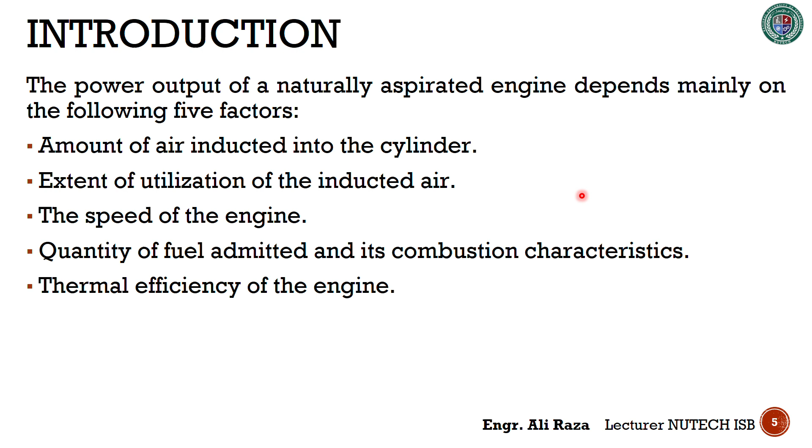It can be seen that the last two factors are interdependent, and major modifications might be required to achieve complete combustion, so this may not be a preferred method. The fourth and fifth factors are interdependent because if the quality of fuel is good—for example, if we are using high octane fuel—then the thermal efficiency of the engine will be high. If we are using low octane fuel, or the quality of fuel is not good, it will affect the efficiency of the engine. So these two factors, fourth and fifth, are interdependent.

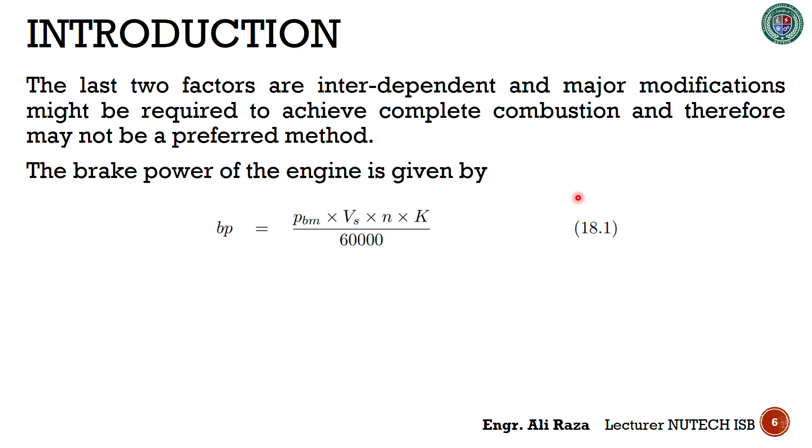The brake power of the engine is given by equation 18.1. Let me clarify that we are now learning chapter 18 from the book IC Engines by V. Ganesan. In these equations, we can see there are different parameters like brake power, brake mean effective pressure, swept volume, number of strokes, and number of cylinders in equation 18.1, which is the equation of brake power.

There are two factors in this expression, apart from the number of cylinders and cubic capacity of the engine, which can increase the power output. The first one is number of power strokes, and the second one is brake mean effective pressure, which is basically generated in the combustion chamber. So for a given capacity, we can increase the power output either by increasing the brake mean effective pressure or by increasing the number of power strokes.

It must be clear to all that there is a limit to the increment of both these parameters. We know that in a four cylinder, four stroke engine, there is only one power stroke among all four strokes, and the other three strokes are suction, compression, and exhaust. So it is interesting to see that there is only one power stroke in the four strokes of a four stroke engine.

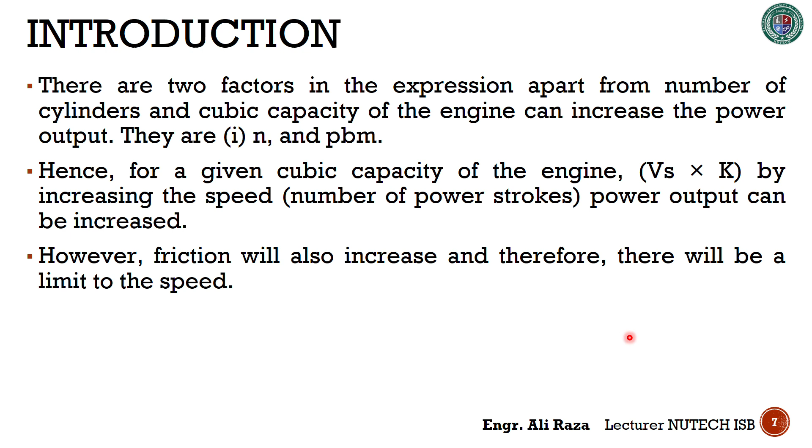However, by increasing the mean effective pressure, we will see there is a limit, because increasing it too much will create a lot of vibration and affect the pressure and temperature of the engine, so we have to see how much we can increase the mean effective pressure. In one line, we can say that if we increase the mean effective pressure of the engine, we can increase the power output of the engine. So the most preferred method of increasing power output is by increasing the mean effective pressure, which we can achieve by supplying more air or air-fuel mixture at a pressure higher than atmospheric pressure.

This will increase the density, thereby the mass of air or air fuel mixture inducted for the same swept volume. It is interesting to note that we are not changing the swept volume of the engine, but we are inducting more amount of air fuel mixture. So what will be the result? We will get high brake mean effective pressure, and then we can get high power output of the engine.

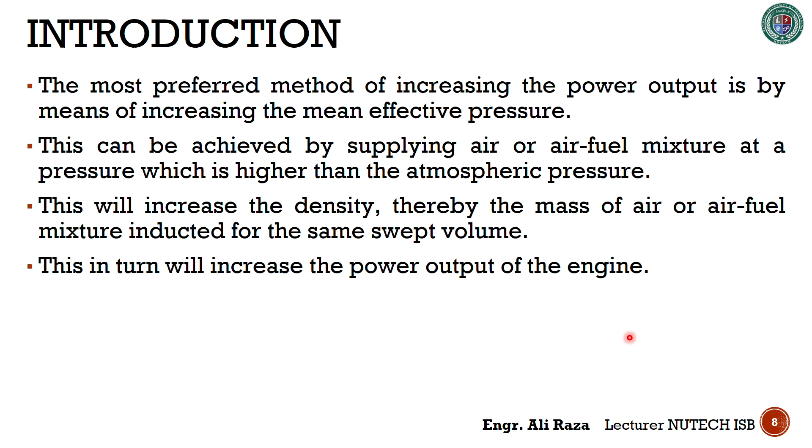At this moment, let us define the term supercharging. The method in which we can supply more amount of air or air fuel mixture at a pressure higher than atmospheric pressure is known as supercharging, and we use a device for this method called a supercharger. The bookish definition: supercharging is the method of supplying air or fuel air mixture at pressure higher than that at which the engine naturally aspirates by means of a boosting device, and the device which boosts the pressure is called the supercharger.

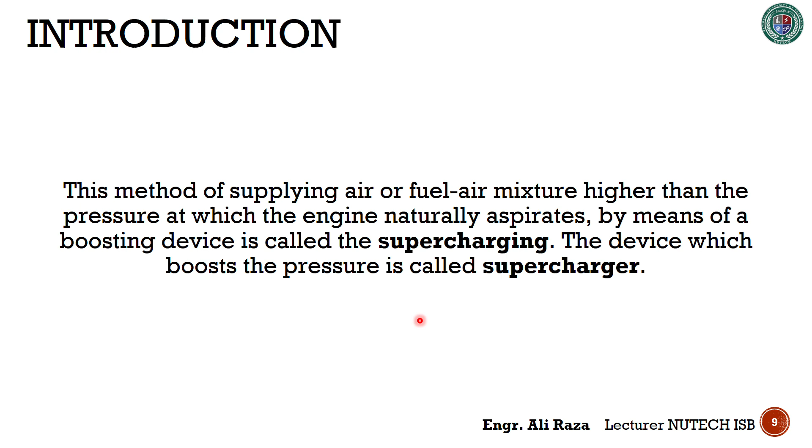So at this moment we have learned why we are using the supercharger, what process is known as supercharging, and which device is known as supercharger. Let's move further. The main purpose of supercharging is to raise the density of the air charge before it enters the cylinder.

There may be 15%, 20%, or maybe 30% increment in the amount of air that is being inducted in the engine cylinder. Thus, the increased mass of air will be inducted, which will then be compressed in each cylinder. It is interesting that at the same swept volume, more air is being inducted in the engine. This makes more oxygen available for combustion than the conventional method of drawing fresh air charge into the cylinder.

Consequently, more air and fuel per cycle will be forced into the cylinder, and this can be effectively burned during the combustion process to raise the engine power output to a higher value than would otherwise be possible. It is like when there is a more amount of air and air fuel mixture, it will obviously give a higher amount of combustion.

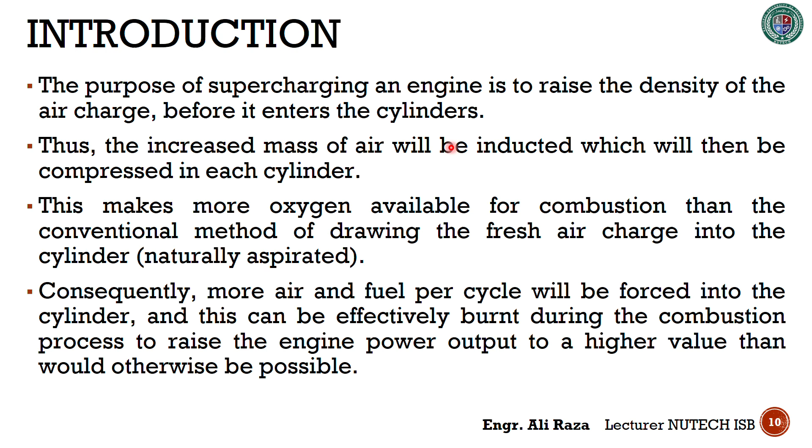There are some more important points in the process known as supercharging. Supercharging increases the power output of the engine. It does not increase the fuel consumption per brake kilowatt hour. This is the most important point. Sometimes we mislead the term supercharging by saying that it can increase fuel consumption, but it is not true. Supercharging does not increase the fuel consumption.

Certain percentage of power is consumed in compressing the air. This power has to be taken from the engine itself, leading to some power loss. But in practice, the power produced by supercharging is more than this power loss. However, it is seen that net power output will be more than the power output of an engine of the same capacity without supercharging.

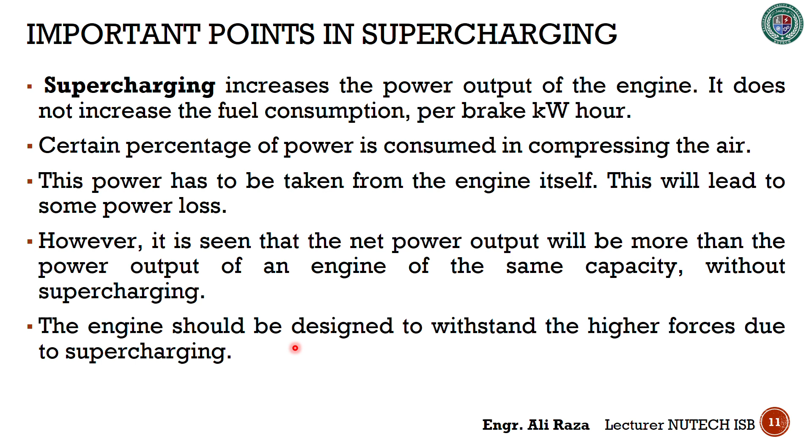The engine should be designed to withstand the higher forces due to supercharging, because the increase in pressure will create more vibrations and other thermal stresses on the parts of the engine. The increased pressure and temperature as a result of supercharging may lead to detonation. Therefore, the fuel used must have better anti-knock quality, meaning it must have a high octane number or high cetane number. In practice, racing car engines use supercharging.

The most important areas where supercharging is of vital importance are: first, marine and automotive engines, where weight and space are important. In marine engines there is a lot of problem of space and power, because there is much more space available in ships compared to ordinary trucks and buses, so we need a lot of power to run that marine ship in the ocean. Second, engines working at high altitudes - the power loss due to altitude can be compensated by supercharging.

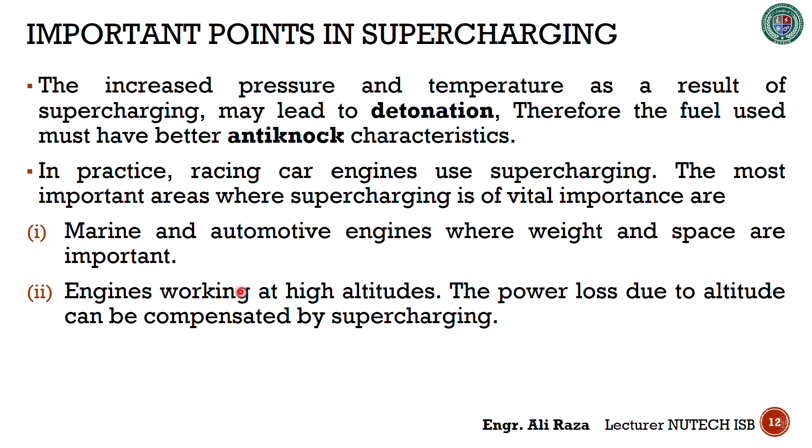Supercharger is a pressure boosting device which supplies air or mixture at a higher pressure. A centrifugal or axial flow or displacement type compressor is normally used for supercharging. If the supercharger is driven by the engine crankshaft, then it is called a mechanically driven supercharger, linked with the crankshaft of the engine. Some superchargers are driven by a gas turbine which gets its power from the engine exhaust gases - such a supercharger is called a turbocharger. So we can see that there is not much difference between a supercharger and a turbocharger.

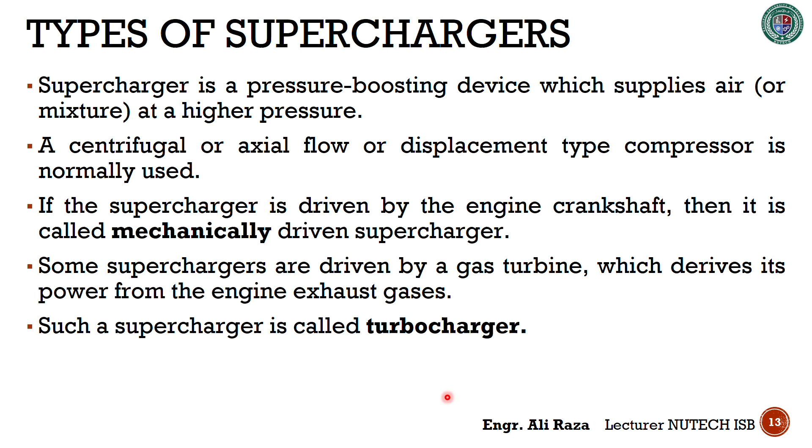So at the moment, let's see the types of superchargers. There are three types of supercharger: centrifugal type, roots type, and vane type supercharger.

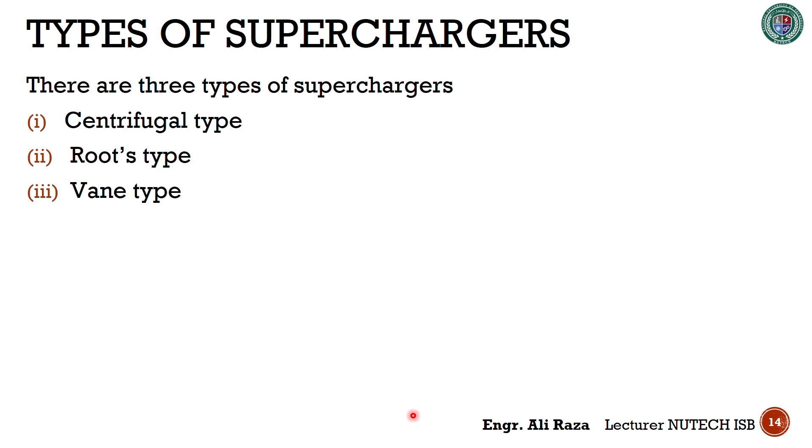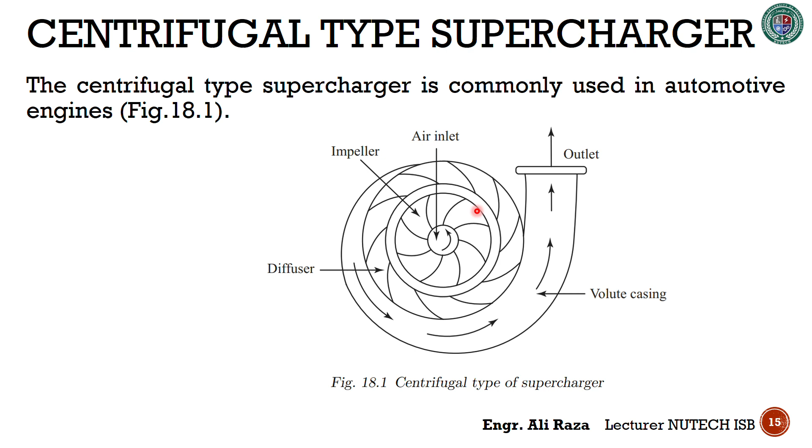So this is the complete functioning of a centrifugal type supercharger, which is commonly used in automotive engines. These are all the processes, qualities, or characteristics of centrifugal type superchargers discussed earlier.

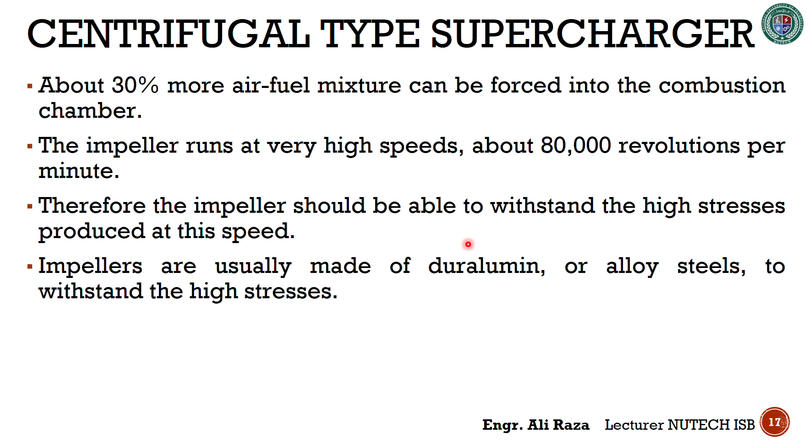The gears are of equal size, and therefore both rotors rotate at the same speed. Due to the equal size of gears, both rotors have the same speed. The Roots supercharger operates like a gear pump.

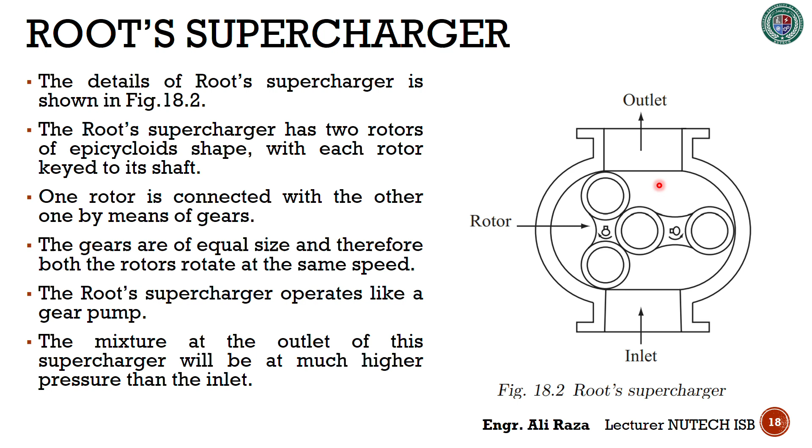The mixture at the outlet of the supercharger will be at much higher pressure than the inlet. Here we have the inlet and here we have the outlet. We can see that the schematic diagram of the Roots supercharger is simpler than the centrifugal charger.

Here we have another supercharger known as the vane type supercharger. This is the third type of supercharger. Let's see the properties of this supercharger.

These vanes can slide in or out against the force of the spring. A spring is attached to each vane, and because of this arrangement the vanes are always in contact with the inner surface of the body, due to the force of the spring.

The space between the inner surface of the body and the drum decreases from inlet to the outer side. In this way, the quantity of mixture which enters the inlet decreases in volume, because of which the pressure of the mixture increases as it reaches the exit. The pressure at the exit will be much higher than the pressure at the inlet.

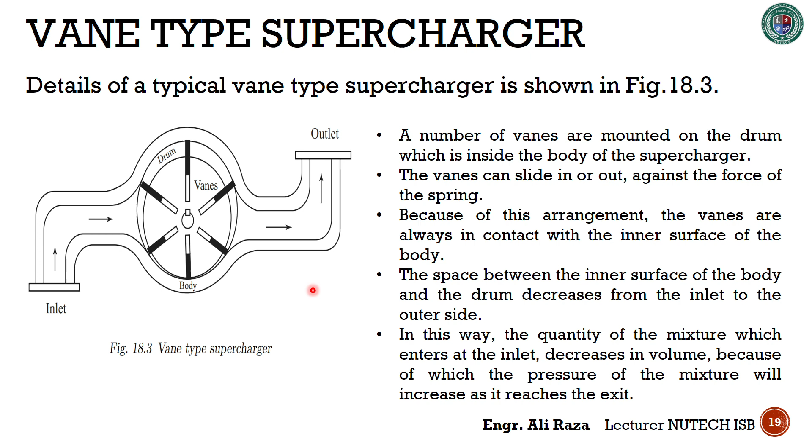So these are the three types of supercharger. Now let's see some comparison between these types of superchargers.

This is because due to repetitive contact between the body and the vanes, there is a large possibility that these vanes get worn with the passage of time. Therefore, one has to take into account the application and then decide the type of supercharging for that specific application.

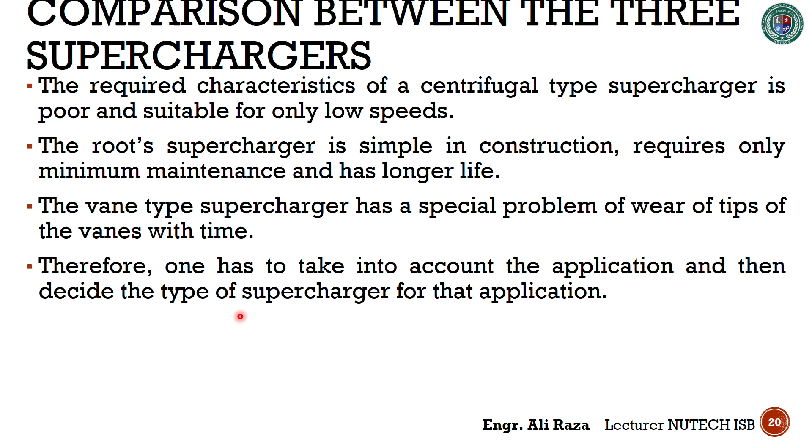Now let's move towards the methods of supercharging. Normally, there are 4 to 5 methods of supercharging, which we will see here. The first one is independently driven compressor or blower, usually driven by an electric motor, and then ram effect. Third one is under piston supercharging. Fourth one is Kadenacy system, applied to two-stroke engines only, and then we have engine driven compressor or blower.

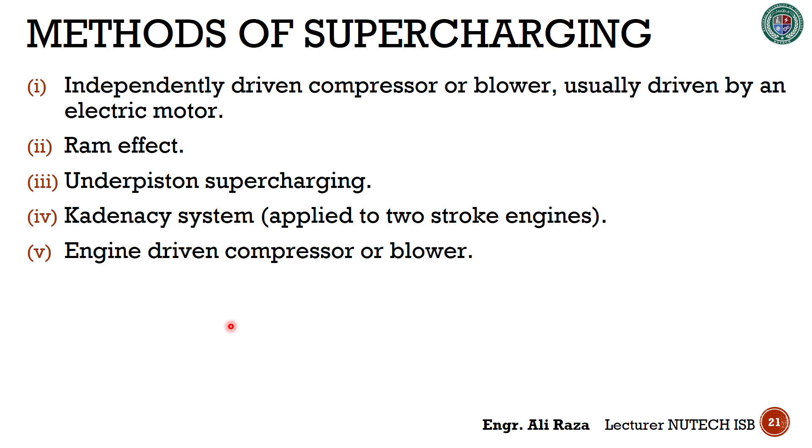Now we'll see the effects of supercharging. Before supercharging an engine, one should understand its effect. Let me clear that all the effects are not positive. There may be some effects which we can take as positive, and also some effects that are negative, but they do not have a good effect on the engine and other vehicle parts. Let's see them one by one.

The first one is high power output. The second one is greater induction of charge mass due to high pressure, better atomization of fuel, better mixing of air and fuel, better scavenging of products. In this way, we can send out the exhaust gases in a very quick manner. Better torque characteristics over the whole speed range. We can get more torque from the same engine with the same swept volume.

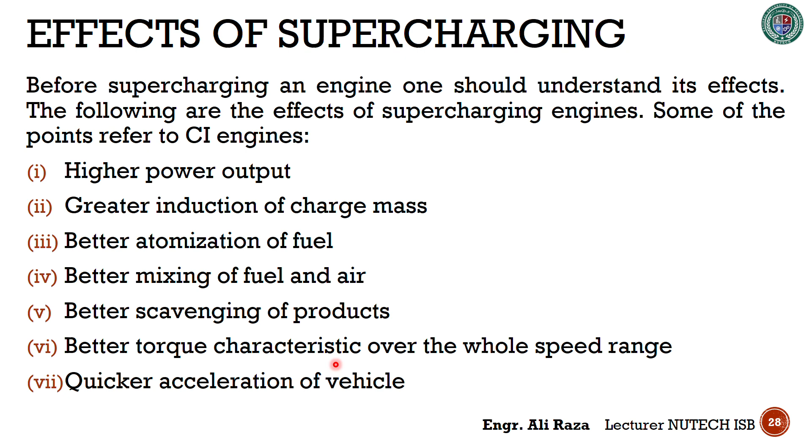Quicker acceleration of the vehicle, more complete and smoother combustion. It is because when we are sending the air fuel mixture at a higher pressure, it also increases the temperature of the mixture. That's why combustion becomes complete and smoother. As you know, incomplete combustion causes detonation or knocking in the engine, and we can use inferior or poor ignition quality fuel in this way.

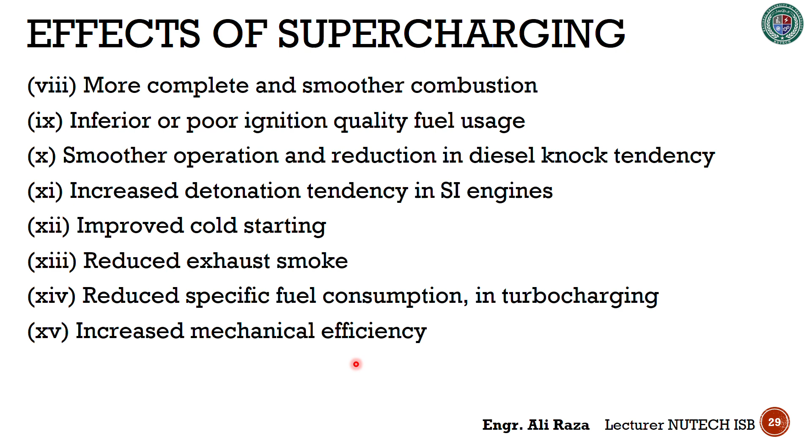Smoother operation and reduction in diesel knock tendency, but increased detonation tendency in the SI engine. It is because when we send the mixture at higher pressure, it increases the temperature, and sometimes fuel is burnt before it is required. And then we have improved cold starting, reduced exhaust smoke, reduced specific fuel consumption in turbocharging, and increased mechanical efficiency. These are some effects of supercharging.

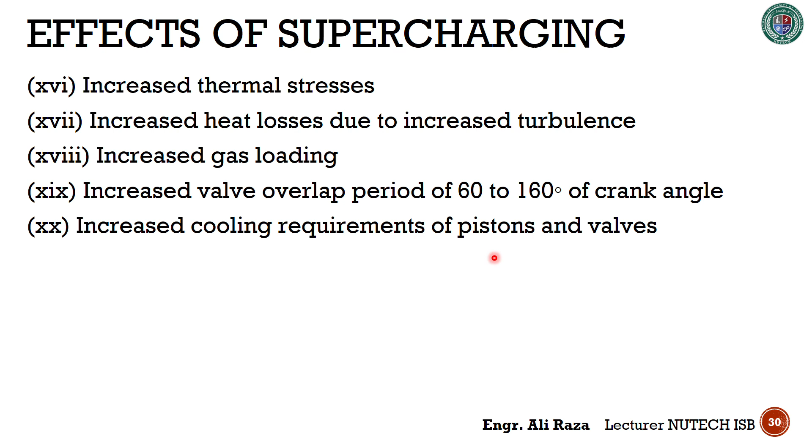Here we have some negative effects: increased thermal stresses on the engine parts, increased heat losses due to increased turbulence. When there is an increase in temperature and pressure, the turbulence will also be increased. Then we have increased gas loading, increased valve overlap period of 60 to 160 degrees of crank angle, and increased cooling requirements of piston and valves, because due to high pressure and temperature, the requirement of cooling will also be increased. So we have to decide accordingly how much supercharging or turbocharging we need to use, within a safe range.

Then there are some limitations to supercharging. Let's see them one by one. Due to supercharging, thermal load on the various parts of the engine increases, which will also increase the thermal stresses. In some engines, the piston crown is provided with a hollow space. Oil or water is circulated through this space, and thereby the piston crown is cooled.

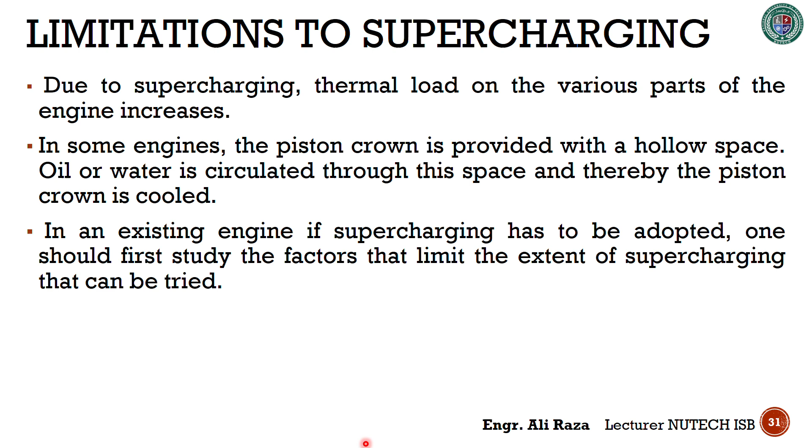In an existing engine, if supercharging has to be adopted, one should first study the factors that limit the extent of supercharging that can be tried. It means we must know how much extra air or air fuel mixture we need to send into the engine. We should not send an excessive amount of air or air fuel mixture to the extent that it may cause problems, such as extra or excessive vibrations in the engine, which will also increase the thermal stresses upon the engine parts.

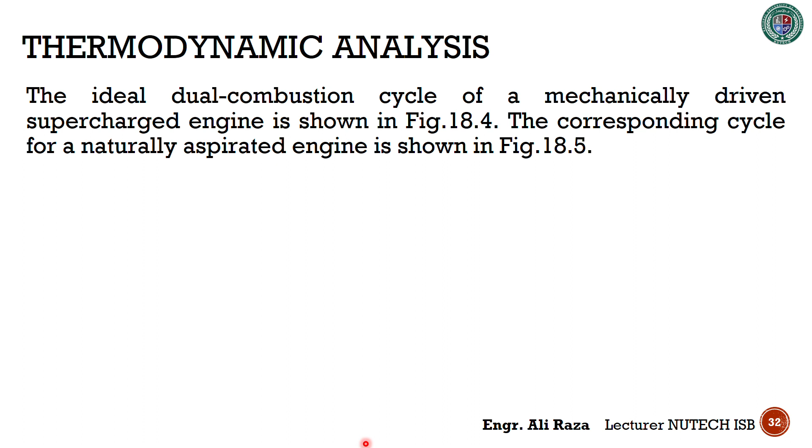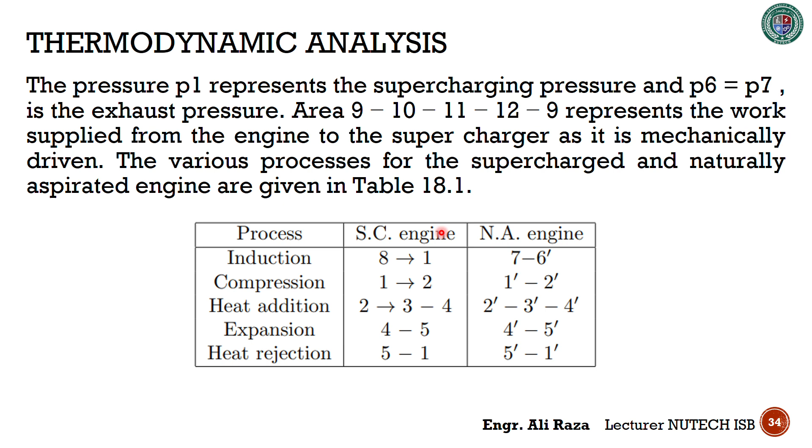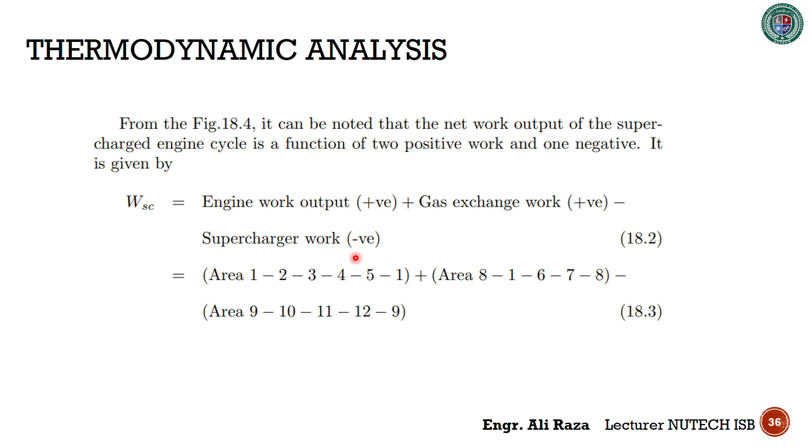So I have explained all these processes using the figures we have just seen. Let's now look at the work output of a supercharged engine. We can see that there are two positive works and one negative work. This negative work is because it has been supplied to run the supercharger from the engine, and then there is the pressurized gas exchange work, which is positive, and a third work. Let's see them one by one. The engine work output is positive, plus the gas exchange work, which is positive, minus the supercharger work, which is negative. Let's see the areas one by one from the PV diagram.

If we talk about the engine work output, it is the area from 1, 2, 3, 4, 5 and 1, and it is positive work. Plus the area of 8, 1, 6, 7 and 8, which is also positive work, known as gas exchange work. And then we have the third one, the negative supercharger work, from 9, 10, 11, 12 and back to 9. We call it negative because the amount of energy has been supplied from the engine to the supercharger. So the net work will be these two positive works minus this negative work.

It should be noted that the positive gas exchange area may be greater than the negative area. Further, with an increase in supercharging pressure, the negative work will also increase, and therefore there is a limit for supercharging. We have also discussed that we should not increase supercharging without any limit, since the ideal efficiency of the supercharged engine will decrease with increase in supercharging pressure. However, it should be understood that the net increase in power output is due to the increase in mass of charge at condition 1. So what we need is just the increased mass at this point, and for this we use the supercharger.

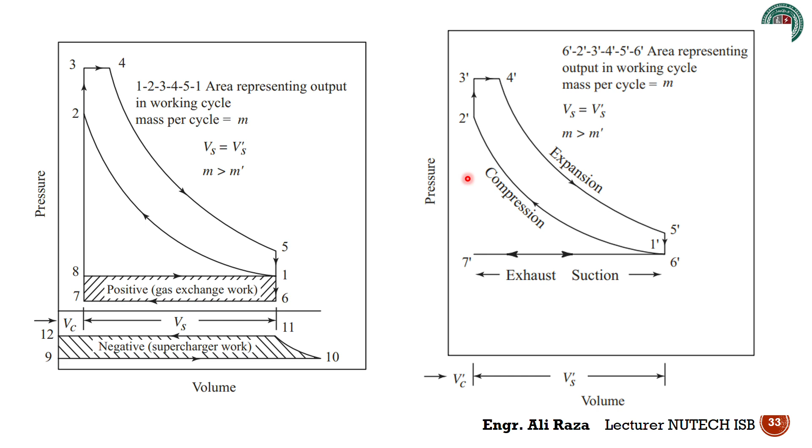Thus, the mechanical efficiency of a supercharged engine is better than that of a naturally aspirated engine. Due to this equation where m is greater than m dash, the mechanical efficiency of a supercharged engine is better than that of a naturally aspirated engine.

Now we'll talk about the power input for a mechanically driven supercharger. The equation of power required to drive the compressor is given by P equals m dot A Cp into T1 and P2 over P1.

There are different parameters involved in this equation, and work done is also involved, where T1 is the initial temperature, P1 is the initial pressure, and P2 is the delivery pressure.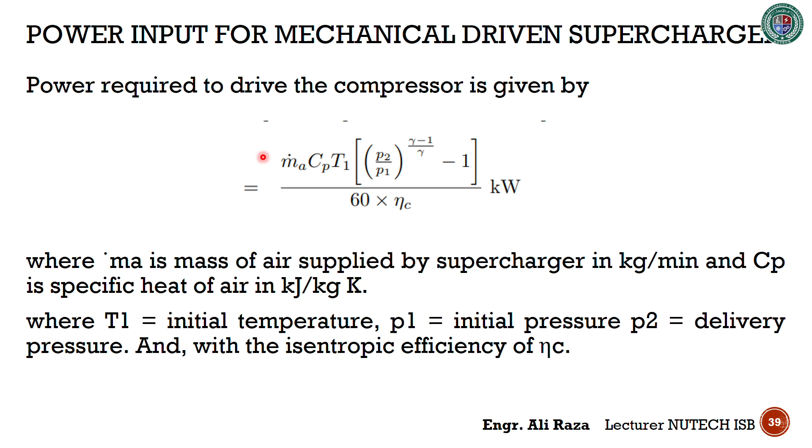And in the last we have isentropic efficiency of the compressor, which is, as you can see from the equation, part of the power equation given.

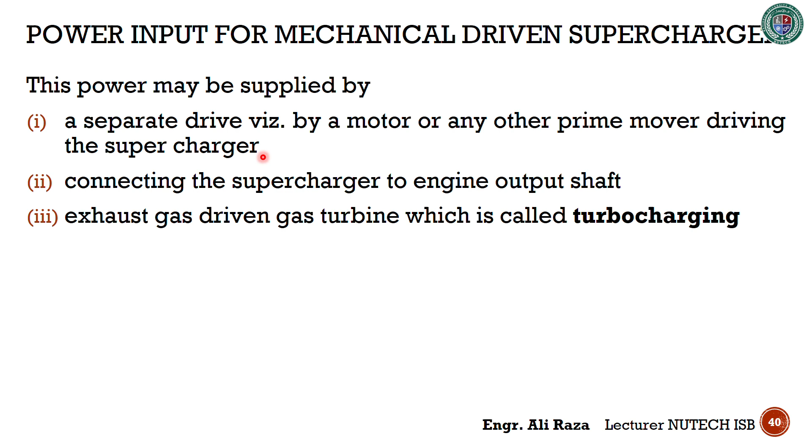This power may be supplied by a separate drive, by a motor or any other prime mover driving the supercharger, by connecting the supercharger to the engine output shaft, or by an exhaust gas driven gas turbine. If the supercharger is driven by a gas turbine connected with the exhaust, this mechanism is known as turbocharging.

So now let's talk about turbocharging. In turbocharging, the supercharger is driven by a gas turbine which uses the energy in the exhaust gases. There is no mechanical linkage between the engine and the supercharger. The major parts of a turbocharger are the turbine wheel, turbine housing, turbo shaft, compressor wheel, compressor housing, and bearing housing.

In the next figure, it will be shown what is the principle of exhaust turbocharging of a single cylinder engine, and a Vee type engine with a charge cooling unit respectively. These are the figures, but we will discuss them later.

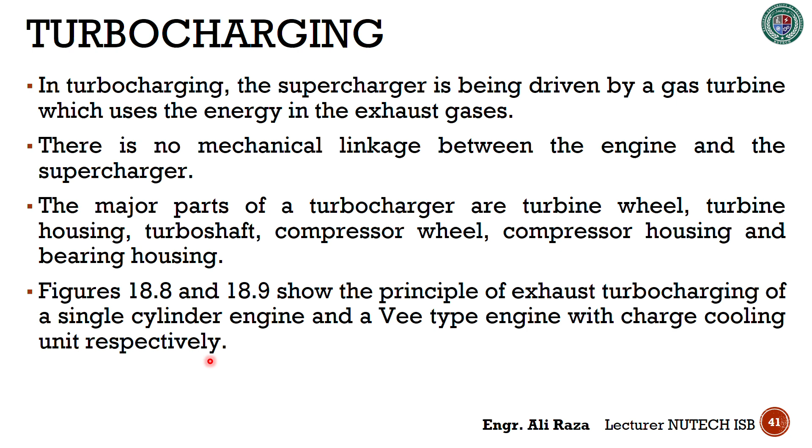During engine operation, hot exhaust gases blow out through the exhaust valve opening into the exhaust manifold. The exhaust manifold and connecting tubing route these gases into the turbine housing. As the gases pass into the housing, they strike the fins or blades on the wheels of the turbine.

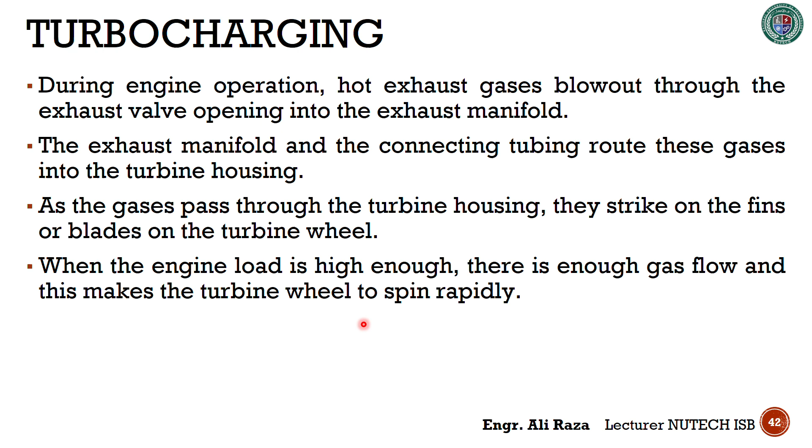When the engine load is high enough, there is enough gas flow to make the turbine wheels spin rapidly, and there is a minimum amount of pressure required to spin them. The turbine wheel is connected to the compressor wheel by the turbo shaft.

As such, the compressor wheel rotates with the turbine, which sucks air into the compressor housing. This generates centrifugal force, which throws the air outward, causing it to flow out of the turbocharger and into the engine cylinder under pressure.

In turbocharging, there is a phenomenon called turbo lag. It refers to the short delay period before the boost or manifold pressure increases. This is due to the time the turbocharger assembly takes for the exhaust gases to accelerate and the turbine and compressor wheel to speed up. This phenomenon is simply known as turbo lag.

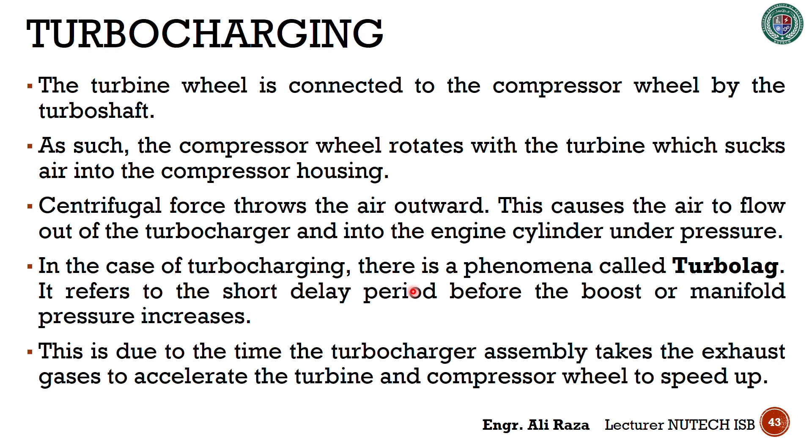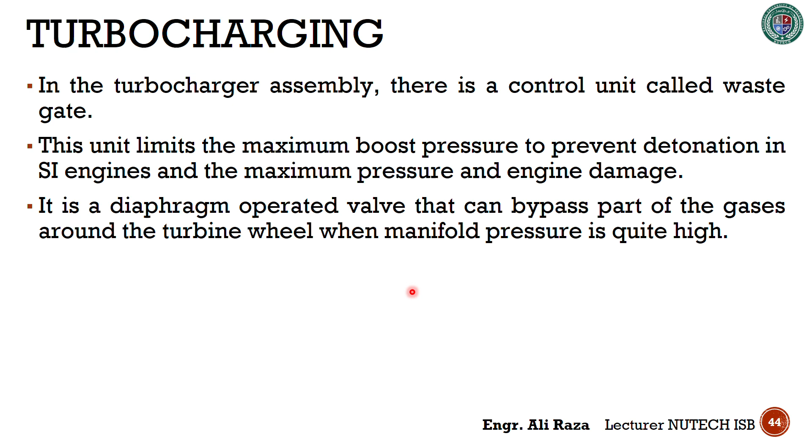In the turbocharger assembly, there is a control unit called the wastegate. This unit limits the maximum boost pressure to prevent detonation in SI engines and prevent engine damage. It is a diaphragm-operated valve that can bypass part of the gases around the turbine wheel when manifold pressure is quite high.

Now let's see some other parameters. The computer-controlled turbocharging system uses engine sensors, a microprocessor, and a wastegate solenoid. The solenoid, when energized or de-energized by the computer, can open or close the wastegate. In this way, the boost pressure can be controlled closely.

This means the attached sensors control everything about the supercharging, determining how much excess air must be sent into the engine.

The exhaust smoke comparison for a diesel engine, for naturally aspirated and turbocharged versions at different loads, can be seen in the next figures. There is an appreciable reduction in smoke in the case of a turbocharged engine in overload operation.

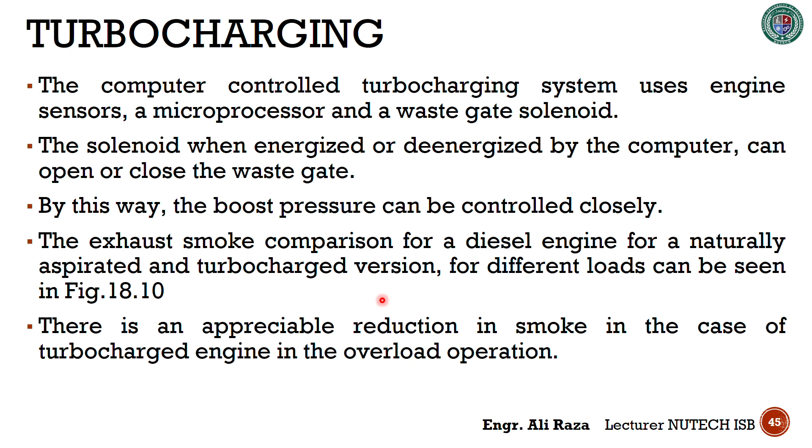Now let's talk about some charge cooling.

When air charge is compressed, it becomes hot. When air charge leaves the compressor, it is at a much higher temperature than the ambient temperature. During supercharging, the temperature of air increases from 60 to about 95 degrees.

When air gets heated, it expands and the density of air is reduced as a result. Because of this, the mass of air entering the cylinder becomes lesser, which reduces oxygen availability for combustion. Further, the supply of hot air to the engine may increase the engine operating temperature, and as a result, the temperature of the engine becomes very high.

So in such cases, the charge is required to be cooled, and it is cooled by the way of intercooling and/or aftercooling to overcome these problems. However, this adds to the complexity of the system. There are some vehicles which use an intercooler to cool the charge.

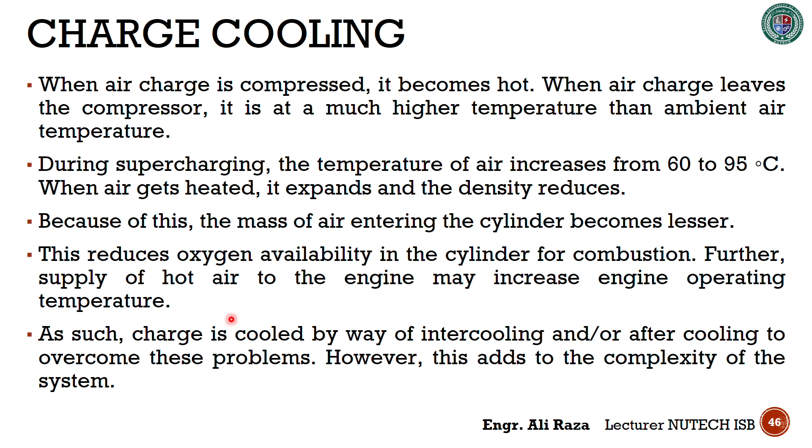Now we have some figures. Basically, these are the methods of supercharging and turbocharging.

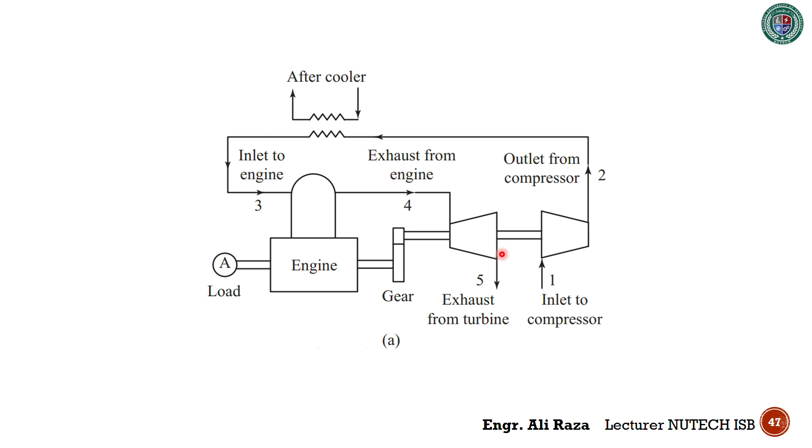And if we see this figure, this is 18.7b. In this figure, we can see that the gas generator type of arrangement is being shown. In this case, the engine drives only the compressor. But if you see the previous figure, the engine and the gear attached from the engine runs the exhaust from the turbine and the compressor. The single shaft, with the help of gear from the engine, is connected to both the exhaust from the turbine and the inlet to the compressor. But in figure 18.7b, it is seen that the engine drives only the compressor.

In this arrangement, the engine is only connected with the compressor with the help of gear shafts. Gears are mounted on the shafts of both the engine and the compressor. Air from the compressor flows through the engine, and the exhaust gases drive the power turbine. Most free piston engines work on this principle.

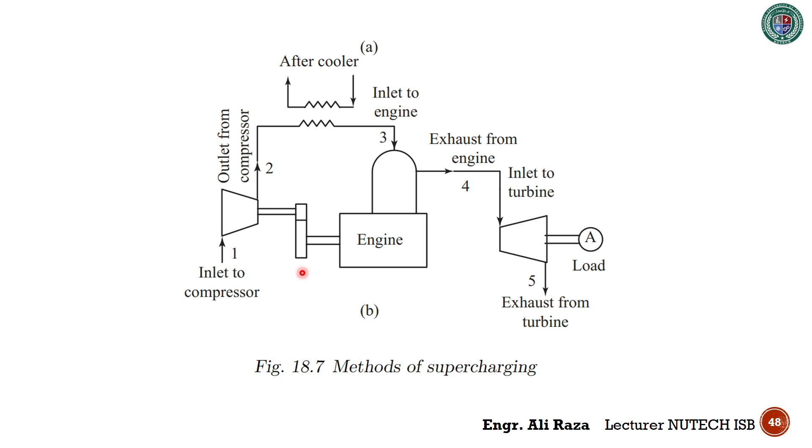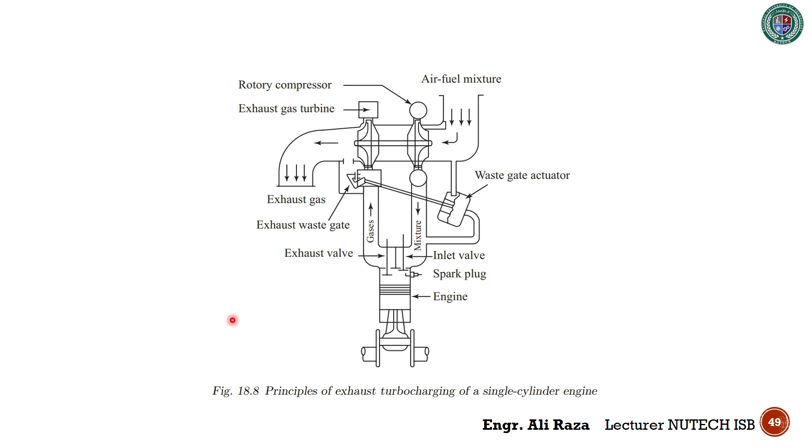You can see this is the complete diagram of turbocharging of a single cylinder, and next we have the turbocharging of a V-type engine, where we have the turbine, the gases, and the compressed air. It's a complete cycle which runs the supercharging. Because in this process the turbine is run by the exhaust gases, this process is known as turbocharging.

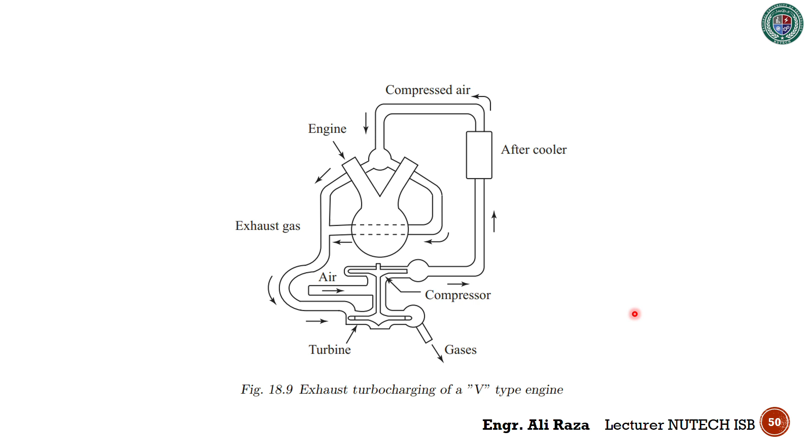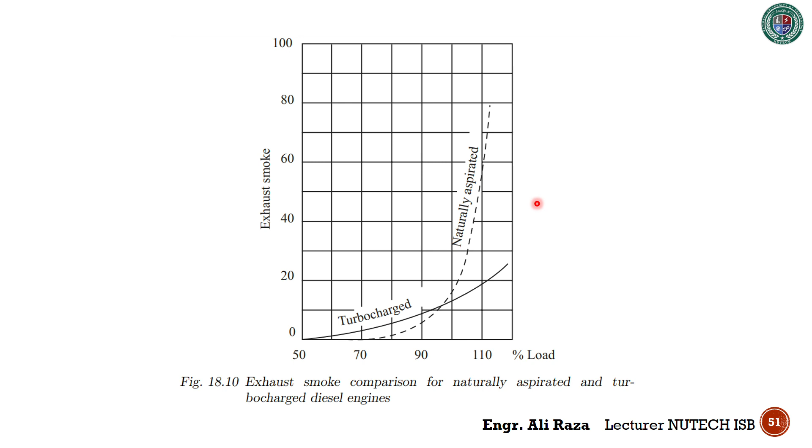In figure 18.10, it's a graph. We can see there are two types of engines, and the graph is drawn between load and exhaust smoke. We can see that when we use the turbocharged engine at full load, the exhaust smoke is about 25 to 26%. But when we use the naturally aspirated engine at full load, the exhaust smoke is about 80%. So there is a difference of about 55 to 60% between the naturally aspirated engine and the turbocharged engine. This means that when an engine is turbocharged, the amount of exhaust smoke is reduced sufficiently.

So this is some workout example, and we'll do it in the next part.